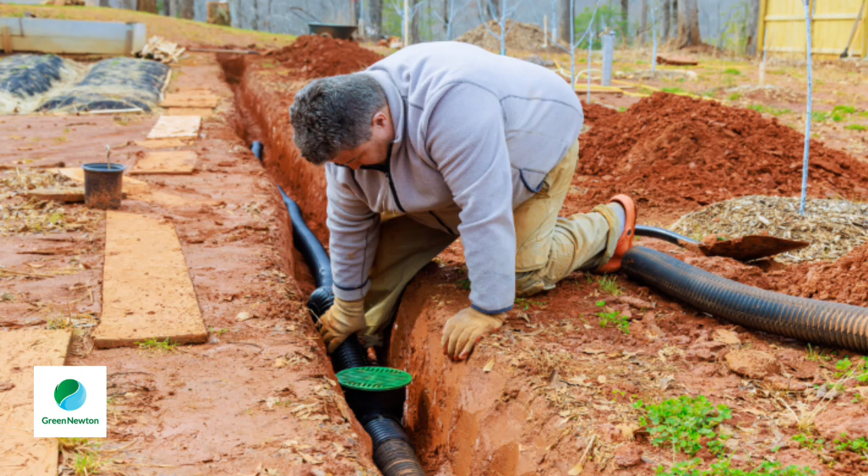At Green Newton, we work with residents, government officials, and businesses to reduce greenhouse gas emissions and build a more sustainable community. And we're excited to see so much local interest in network geothermal. As Peter Barrer will discuss in a few minutes, it's a promising approach to heating and cooling buildings more efficiently and with lower emissions. This effort reflects Green Newton's commitment to advancing real community-based climate solutions.

With support from a HEET grant last year, we began exploring the possibility of a pilot project here in Newton. One of the main areas we're looking at is the neighborhood around Countryside School. And as you may know, the new school building will include a geothermal system designed to be able to connect to a neighborhood network. And to find out whether a neighborhood network is technically and financially possible, we need your

help. We're collecting heating and cooling data from nearby homes through simple, no obligation home visits by trained volunteers. And if you live near Countryside School, please consider signing up. Your participation is essential in helping us explore whether an innovative renewable energy solution can work right here in Newton.

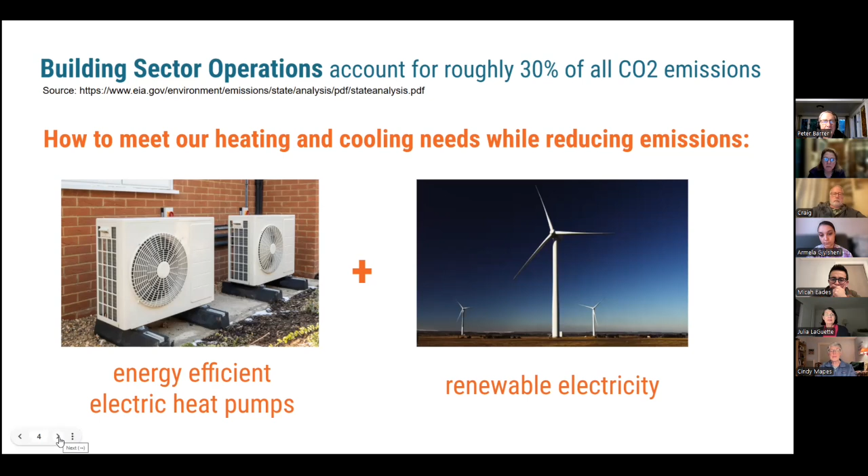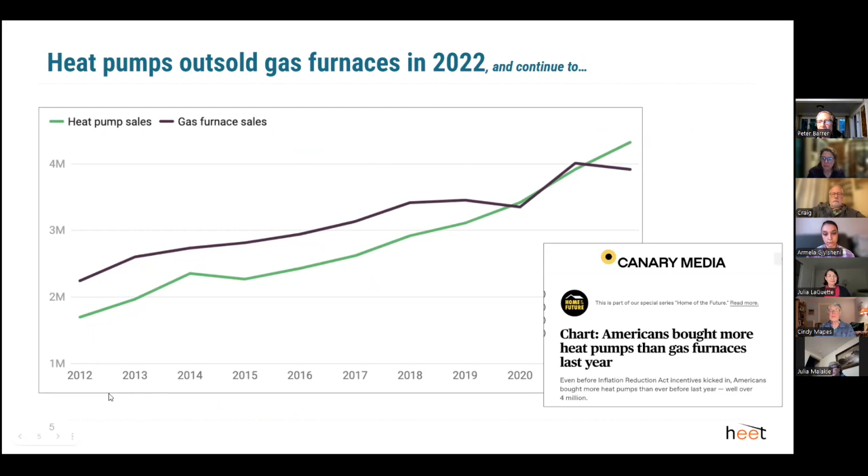So what's happening is the heat pumps are outselling gas furnaces, and they continue to. This is older data. I don't have any newer data, but you can see the green line is heat pump sales in the US, and the black line is gas furnace sales, and this is increasing and increasing. So this is the right trend, and it's proving to be workable, and it works.

So what kind of heat pump? So heat pumps are actually, everybody has a heat pump already on your refrigerator. The heat pump moves heat out of the refrigerator and drops it into the house. Or an air conditioner removes heat from the house and dumps it outside. So these are already heat pumps that we're familiar with. We just don't call them that.

The air source heat pump, also called a mini split, can heat or cool the inside of the house. In the winter, it takes the heat that's available in the atmosphere outside the house and turns it into heat that can be used inside the house. And then in the summer, it reverses the process and takes the heat that's inside the house and sends it outside. It's the same operation, just as if you had turned an air conditioner inside out.

The ground source heat pump, instead of the air, uses the heat that's in shallow ground, which is like 55 degrees year round. In the summer, you can use it as a source to reject heat, and in the winter, a source for heating. And then you've got your network geothermal, which is what this is about, which combines many buildings in the same loop. I'll get a little later into the advantages of that. So these are the kinds of heat pumps there are.

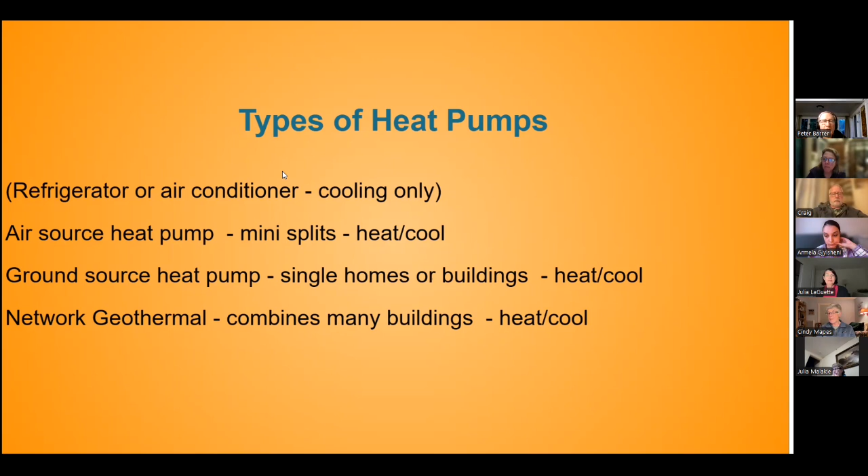So now, what kind of geothermal? Starting at the left, this is common in Iceland: if you drill way down into the heat of the earth, you've got a constant source of heat. It can be used to make steam, or you can take that heat and use it to serve buildings directly. There's no heat pumps involved. The heat just comes from the center of the earth, many thousands of feet deep. Or you can also use that same heat to drive a steam turbine to make electricity. And this is successfully done. It's a very deep well and a central plant kind of approach.

Those are both geothermal. More accessible in Newton in Massachusetts is a single home geothermal. These are much shallower wells, less than 1,000 feet deep, and they go to the 55-degree earth and use it as a source for heating and cooling for a single home. And over on the right, network geothermal, which is what we're talking about here, is you put many of these buildings and a variety of buildings on a single loop.

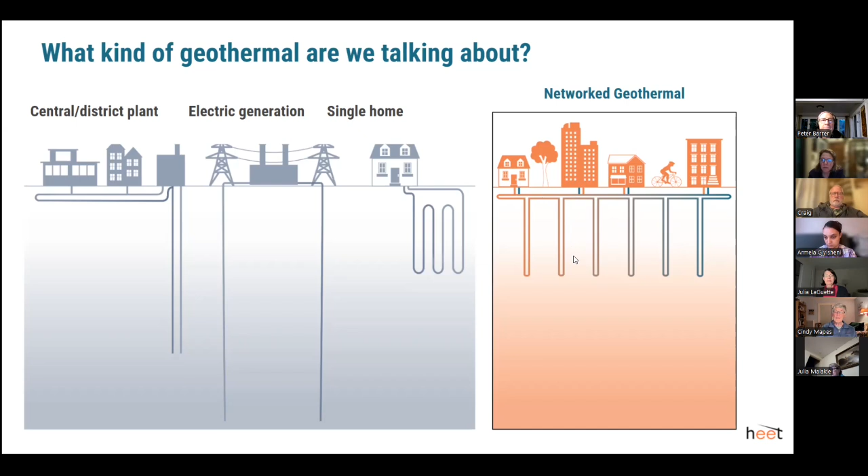The advantage of this is, take an office building in the winter, which often doesn't need heat. There's so much heat inside just generated from the lights and the people and the equipment. And you could share that heat with a home. And that way, it's a source of free heat. Each of the buildings in a network geothermal has its own heat pump, and the water circulates at 55 degrees. All right, I'm going to keep moving.

So this is what a network geothermal schematic looks like. You've got a ground source heat pump in each building. There's infrastructure in the street with the boreholes going down as much as 1,000 feet. And it's a closed loop system. It's filled with water, and the water just circulates around and around, dropping off heat and picking up heat for each part of each building, and also using the ground.

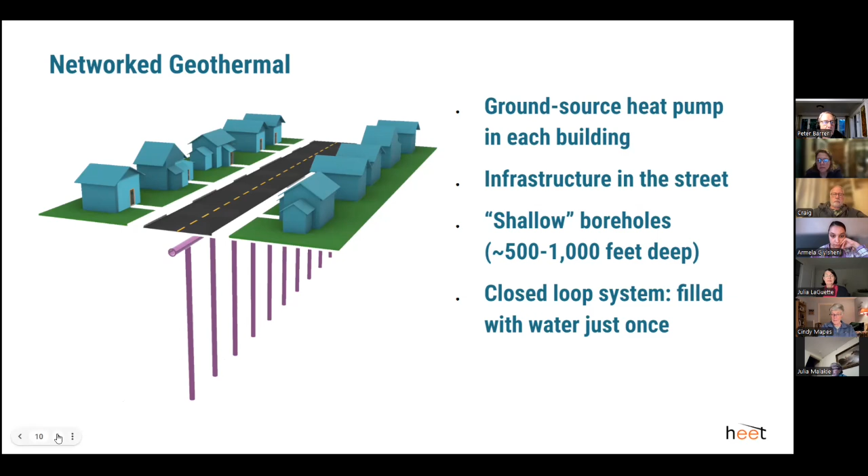And I'm going to show this short video about how this all works. Somebody speak up if you don't hear the sound.

Right beneath our feet, the Earth is soaking up energy from the sun, and it's been doing this for a long time. Near the surface, the ground warms and cools with the seasons, but lower down, it stays at a constant temperature. In Massachusetts, that's 55 degrees Fahrenheit year round. This stored temperature is a source of renewable energy. It can be accessed to heat or cool a single building without using fossil fuels. But did you know we can also connect entire communities to that renewable source in the ground? How does it work? It starts with underground pipes in the streets, sort of like gas pipes, but filled only with water. The water absorbs the ground temperature of the earth and delivers it to buildings. Pipes connect buildings with different heating needs, so energy is never wasted. Instead, it's exchanged between buildings or stored in the ground until it's needed.

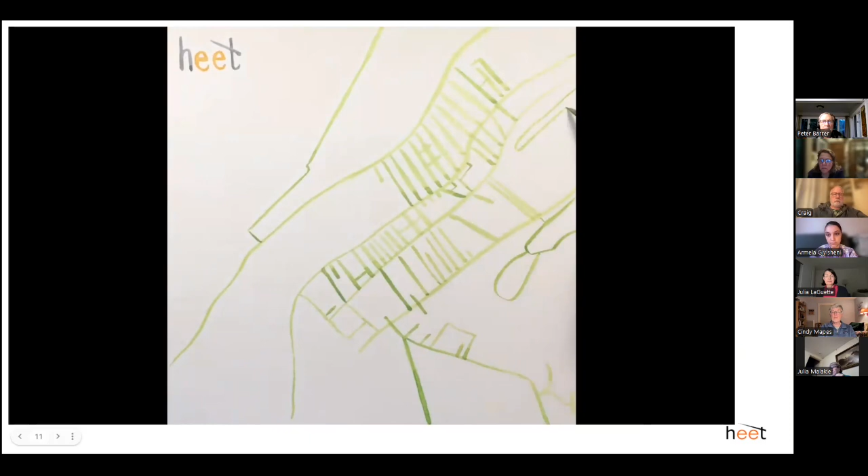Inside, a heat pump moves heat in or out according to the temperature you want. This system of pipes can connect like Lego blocks, gradually moving us all from gas to geo, giving us cleaner air, efficient heating and cooling, and a healthier planet. The idea for this networked geothermal system, run at a utility scale, originated at HEET, a climate solutions nonprofit. When Zeyneb Magavi of HEET found out how expensive it would be to install geothermal for her home, she asked, instead, could a utility provide geothermal energy for me and my neighbors for the same monthly energy bill as gas? Zeyneb worked with HEET founder Audrey Schulman and the HEET team to bring gas utilities, workers, climate advocates, legislators, regulators, and neighbors together to make this system a reality.

Demonstration projects are now moving forward in Massachusetts and across the country. This technology can deliver affordable and reliable energy to our buildings. And unlike gas, it's locally sourced, safe, renewable, and can help get us to zero emissions. It's time to modernize our energy infrastructure to meet the needs of our future. The answer is right beneath our feet. Learn more at heet.org.

Right beneath our feet, the Earth is soaking up energy from the sun, and it's been

Okay, I didn't want to show it twice, but I hope that was helpful. So there are many areas around the country that are looking at possible network geothermal. This is a map of some of that. It's an older map, 2023. There's been more interest since then.

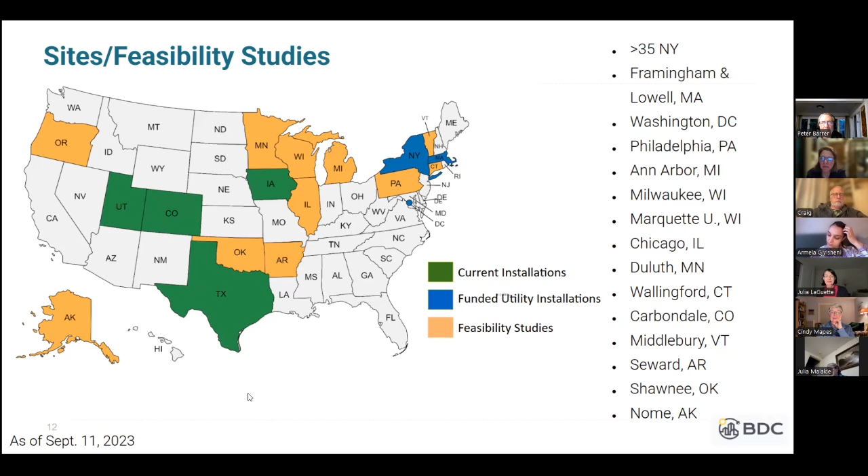How efficient is network geothermal? Well, here it compares: a high efficiency gas furnace has a COP, which is coefficient of performance, where you put 1 unit of energy in, you get less than one out. And the newest gas furnaces are at 95% efficient. So they're a COP of 0.95.

Air source heat pumps have a COP of about 2 to 4, depending on the outside air temperature. When it's especially cold, they're less efficient. As it gets warmer, they get more and more efficient for heating. And the geothermal networks have an average coefficient of performance of nearly 6. That's because they can count on using the ground temperature of 55. I'm an engineer, so this all makes sense to me. I'll welcome any questions later if you have any.

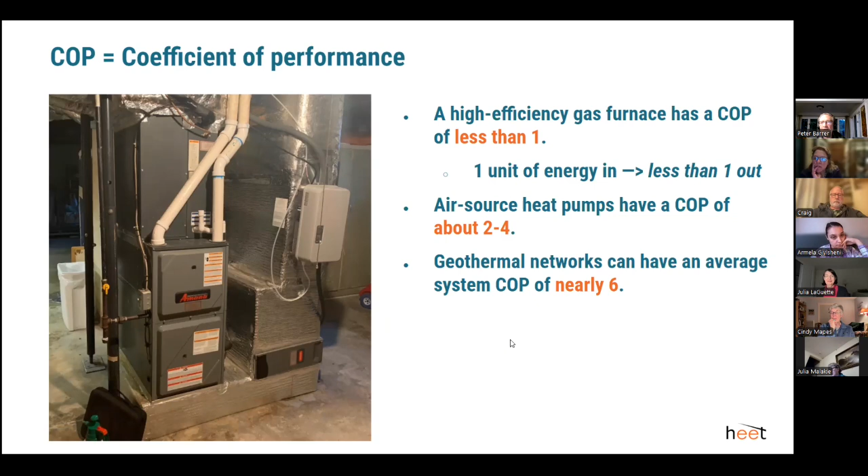So as the video showed, the benefit of this is you can share the heat. So this shows an office building that needs cooling, and it throws away its heat back into the loop. So here you got the cooling going into the building and the heat coming out of it. And then that heat can serve all these other buildings that are on the same loop. It's a really clever idea and very efficient. It works best when you have a variety of different types of buildings.

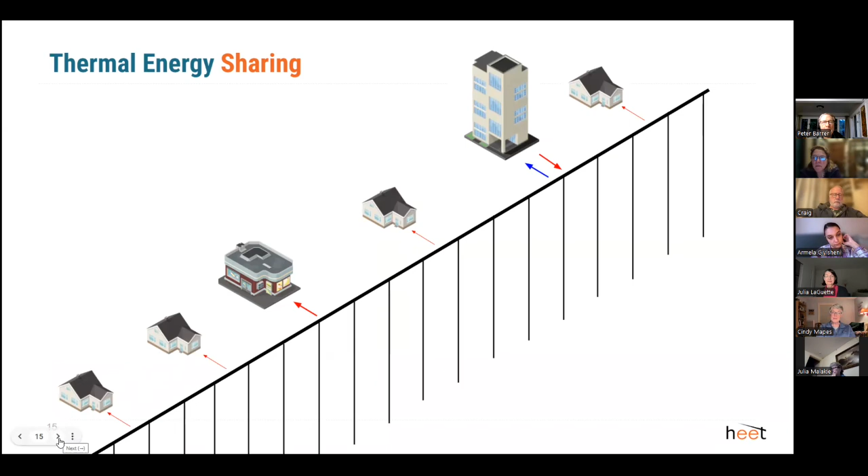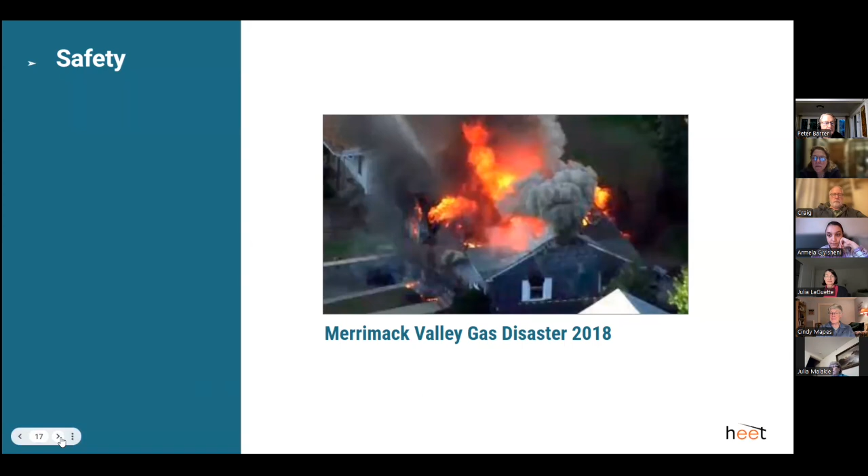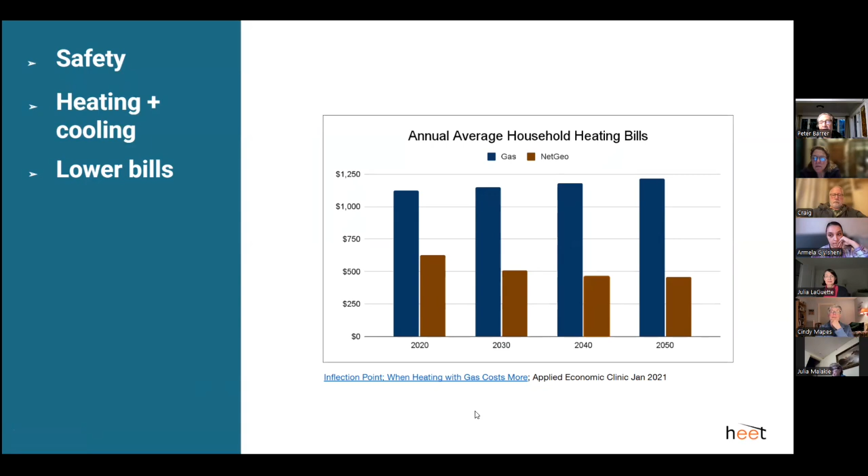So I'm going to go through the benefits. First is safety. There's no gas to explode, burn, and we're reminded of what happened in 2018 in Merrimack Valley. You can use it for heating and cooling. Your bills get lower with net geo because you've got such an efficient source, the 55-degree ground, as the source for heating and cooling.

Of course, you're cutting the emissions of outdoor carbon dioxide and also indoor pollutants. Gas has been found to release pollutants even when it's totally sealed within the house. You're still releasing carbon dioxide and oxides of nitrogen and other things into your home air. And then if it's at all leaky, you've got methane also going into the air.

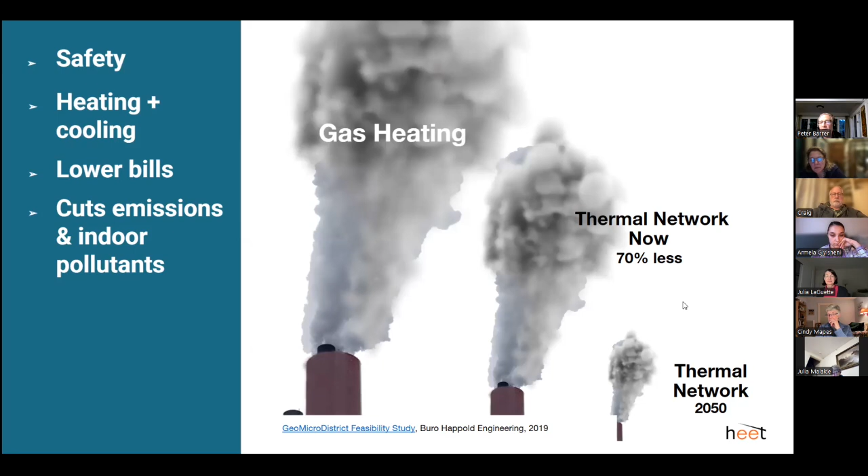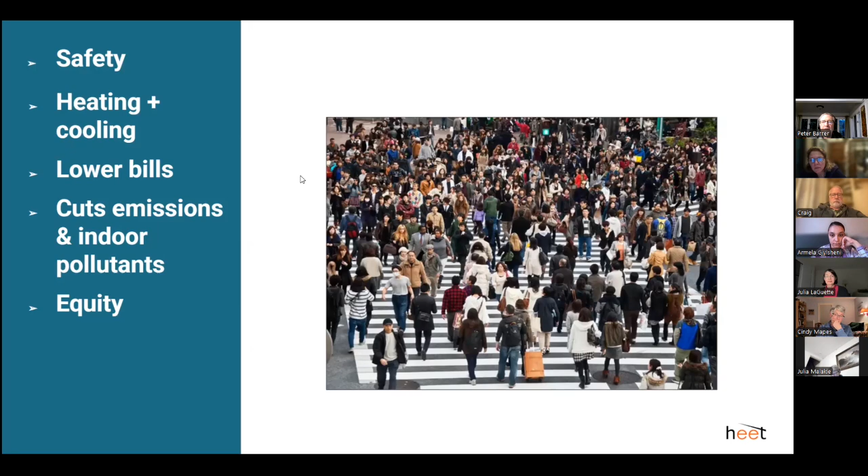It can be used to serve a whole lot of people because you're doing a whole neighborhood. You're not relying on the individual homeowner being able to afford drilling the wells. The cost is shared among everybody. And it provides good jobs for workers.

What's very attractive about this is that the workers in the gas industry have been laying pipes and connecting homes their careers. Those same skills can be used to do network geothermal as water pipes. And the same applies to a gas utility. Instead of going out of business because gas is no longer being used, they could go into the heat business instead.

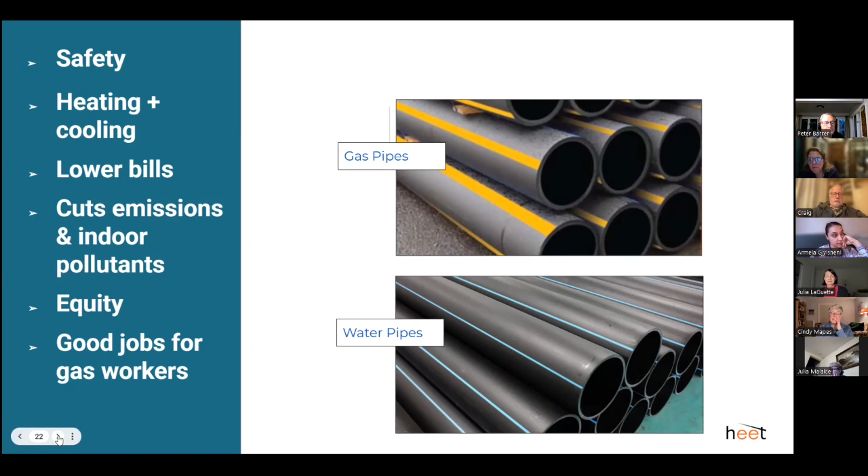So where is this being used? This development in Austin, Texas is operating. I think the one in Toronto is partially built and operating now. And it's much easier to install when you're building a whole new development because you know what's in each house and you're building the streets at the same time. That's the easiest way to do this.

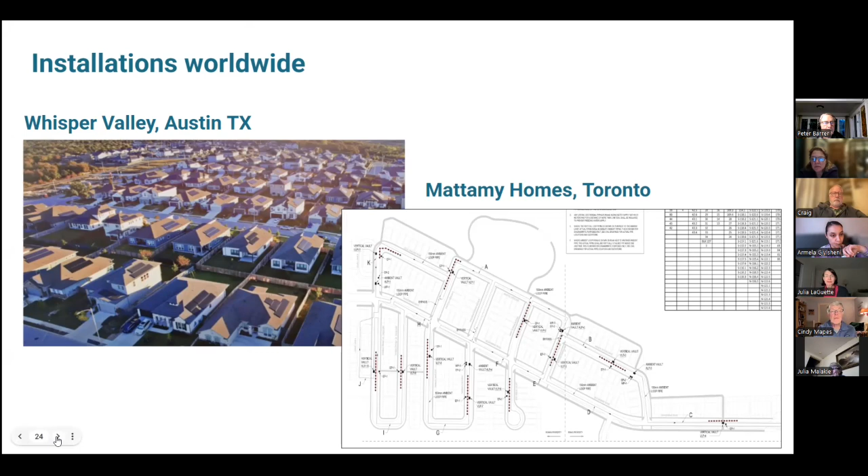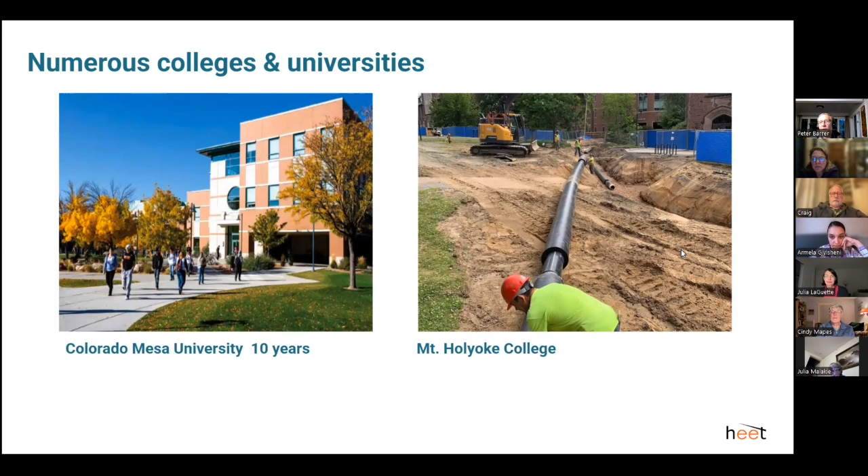Colorado Mesa University has had on campus a shared geothermal network for 10 years. Mount Holyoke is putting one in or has put one in by now. And in Framingham, Eversource has installed a pilot project in downtown Framingham. Here's the workers putting in the water pipes. And this is a map of the schematic of the shared system in Framingham.

You can see it includes the Framingham Public Schools Welcome Center. There's a housing authority series of buildings. The Framingham Fire Department is on the loop. There's a gas station that's on it. And also, I think 24 homes, 20 single-family households and two-family households. And this is an example of what we think we might be able to do in Newton.

And now you run into the complexity of each house being different, and all the homeowners need to agree to proceed. But it's been installed and it's working now, and people are running on geothermal. And they've also made the decision to expand. So the expansion plans are now on the drawing board and it's going to expand.

The nice thing is you can link these together. So you could put a new system up here on the right and link it into the same water loop. And the more diverse the loads, the easier it is.

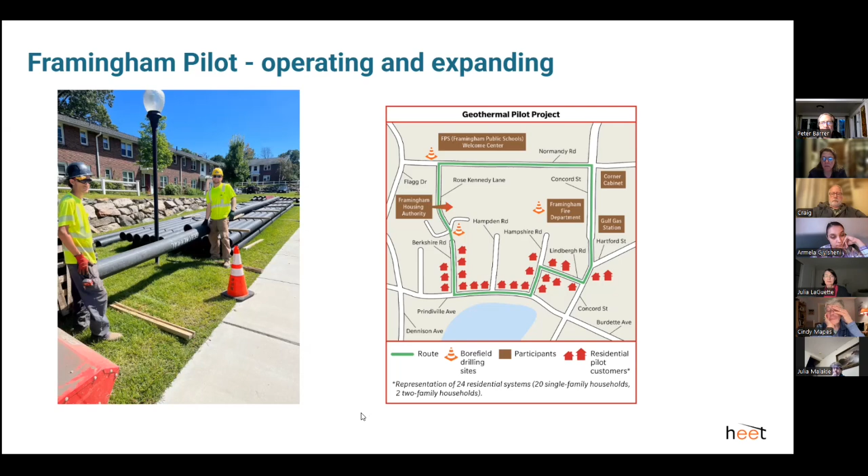So there are wells about to be drilled in the fields around the school, under parking lots, in the fields, all taking advantage of that 55-degree earth temperature, which will be used in heat pumps inside the school to provide heating and cooling. No emissions and very efficient.